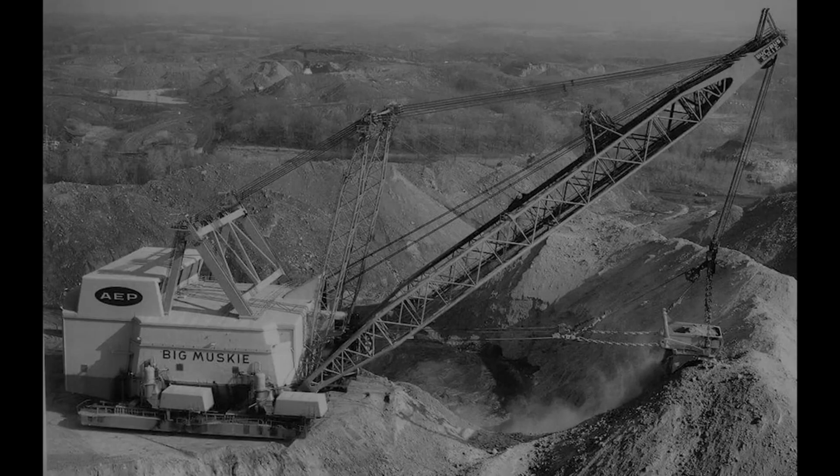A machine 20 stories tall that swallowed 180 cubic yards of earth in a single bite and ran around the clock with a crew living inside it. On September 9, 1991, a hydraulic oil fire ended its reign, and almost nobody noticed.

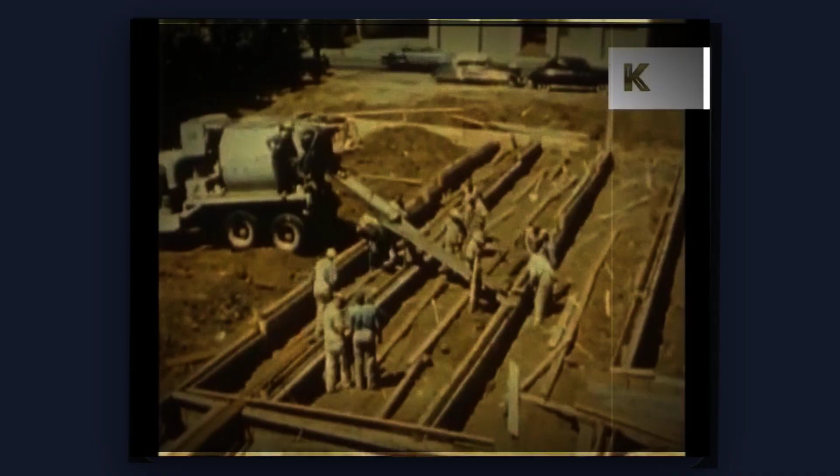The Marion 6360 was just one of 15 forgotten machines that physically built modern America. They carved the highways, poured the dams, lifted the skylines you pass every day. Most weren't abandoned because they failed. They vanished for reasons almost no one talks about.

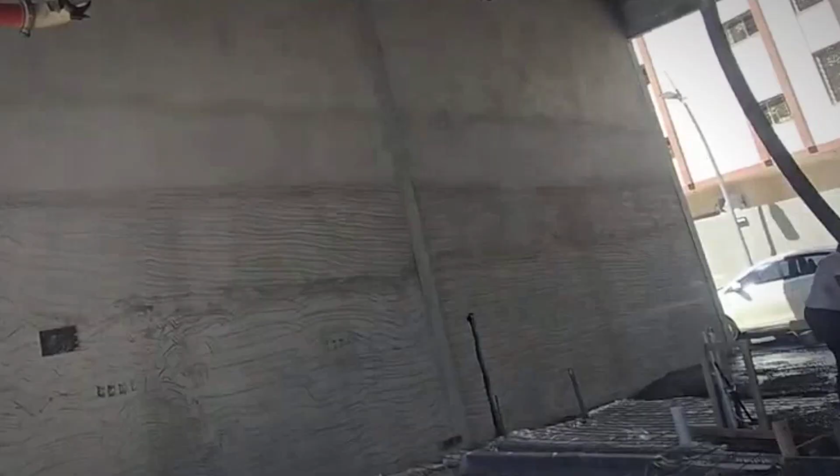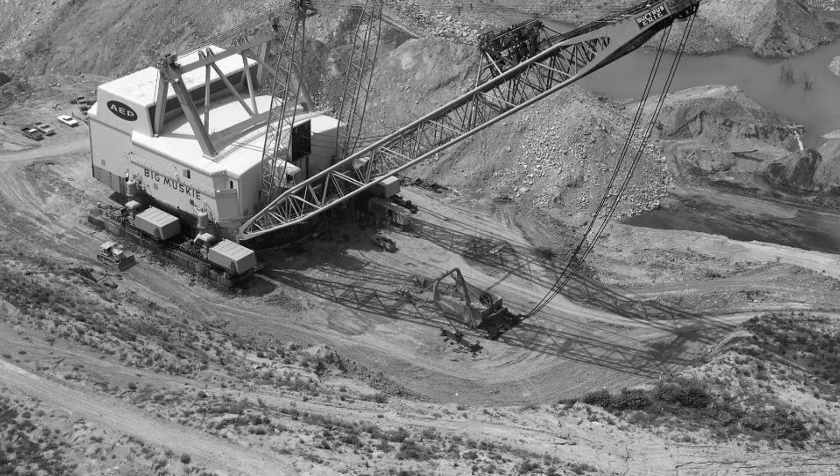Every mile of interstate, every stretch of city skyline, every concrete slab beneath a shopping mall, none of it appeared by chance. Beneath the surface of the modern American landscape lies the legacy of machines so vast and powerful, their very existence now feels improbable. These giants once thundered across open plains and city foundations, reshaping entire regions before quietly vanishing from view.

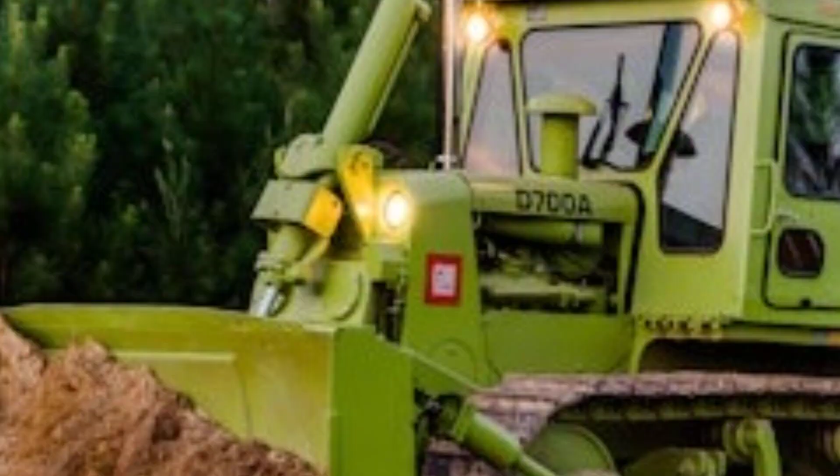The highways that carry millions of cars each day, the dams holding back rivers, the tunnels that snake beneath cities all began as raw ambition, realized only through the brute force of heavy machinery now absent from the public eye. Most people walk city streets or drive rural highways without ever thinking about what made them possible. Yet for every ton of concrete and steel, for every acre of leveled ground, a forgotten machine did the heavy lifting. These were not just tools.

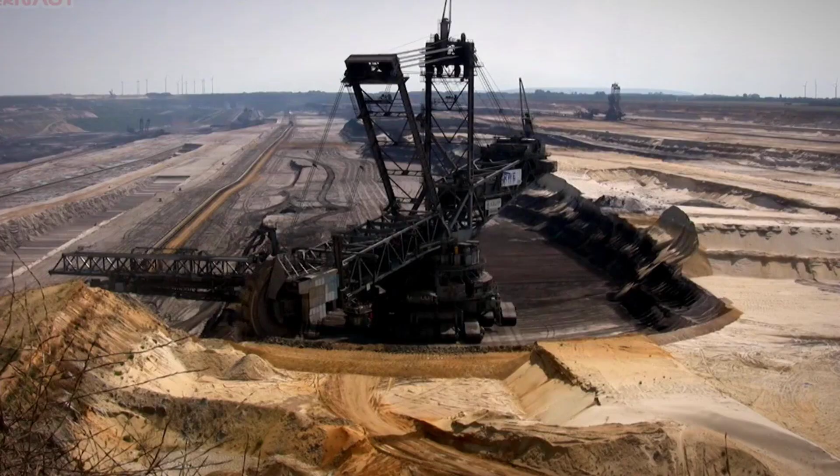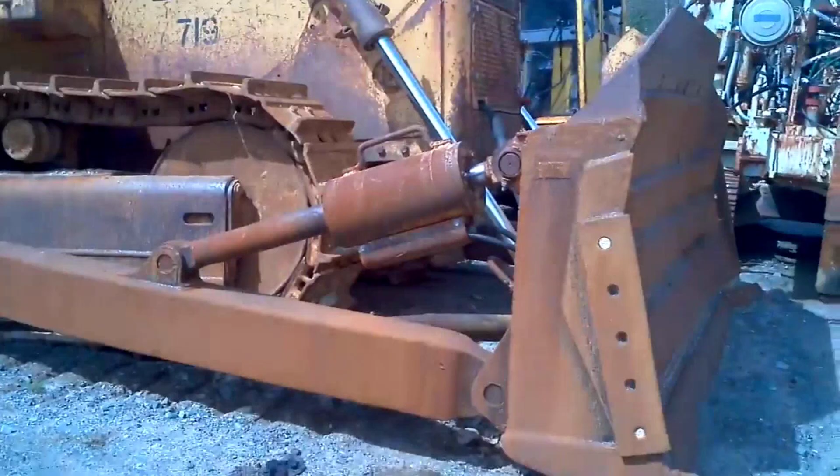They were moving factories, consuming mountains, pouring rivers of concrete, and carving paths through bedrock. The scale defies imagination. Machines that could move thousands of tons in a single shift, some so large their crews lived inside them for days at a time. Their work transformed wild landscapes into the foundations of daily life, leaving no visible trace except the world we now take for granted. Today, the machinery that built America is rarely seen or even remembered.

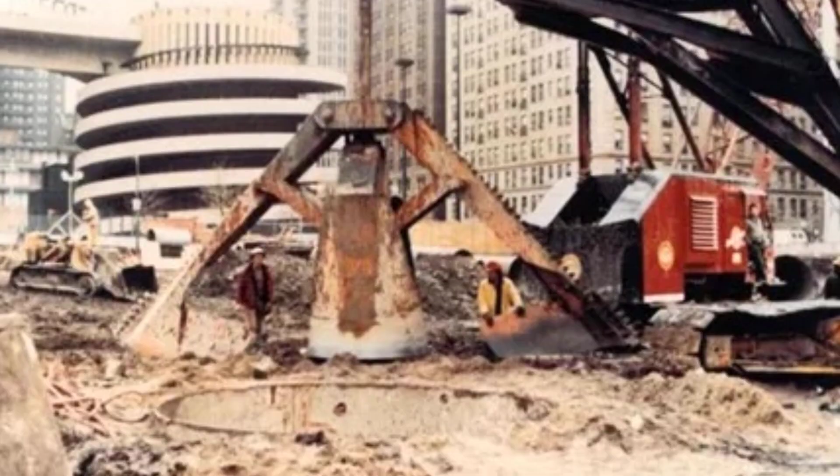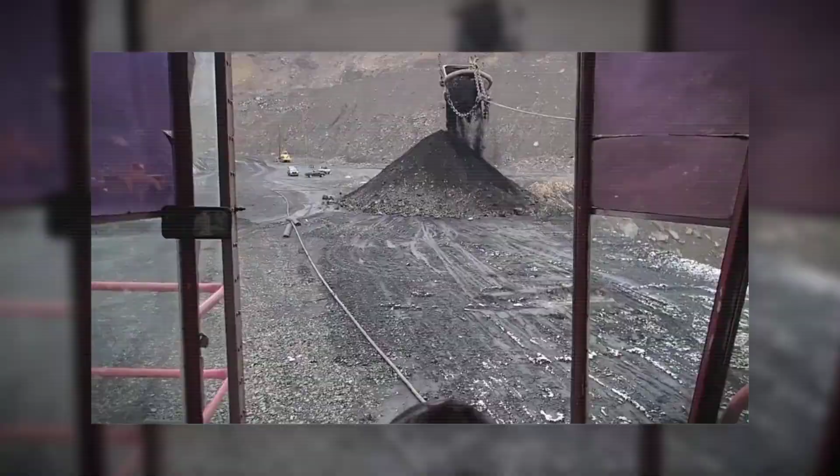Their names have faded, and their forms have disappeared, replaced by smaller, quieter, and more efficient descendants. Yet every bridge, every airport runway, every city block still rests on the labor of these vanished giants. Hidden beneath the noise of traffic and the bustle of cities, their legacy endures in concrete, steel, and earth. The story of America's rise is not just one of visionaries and architects, but of machines whose power and ingenuity remain buried in the landscapes they created.

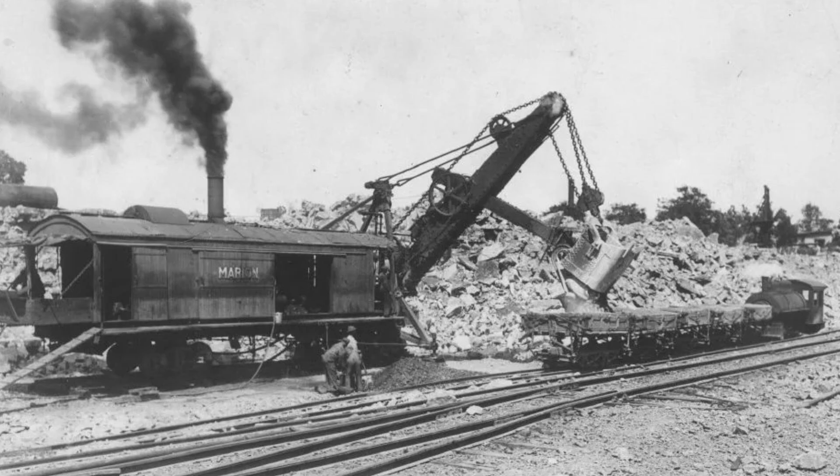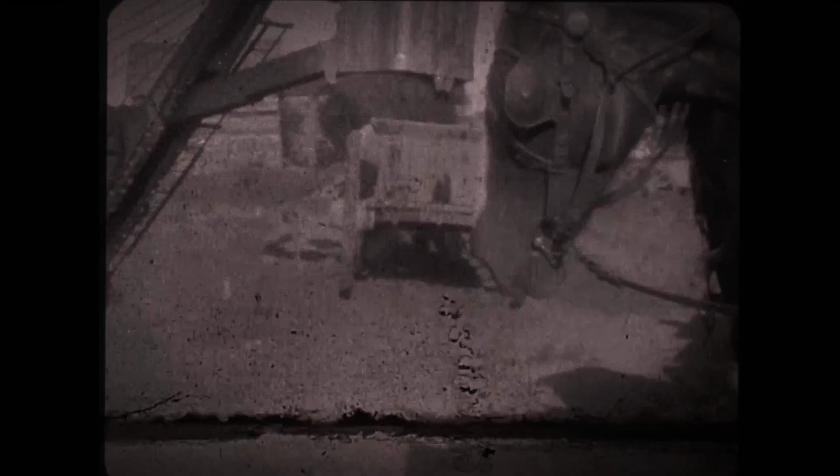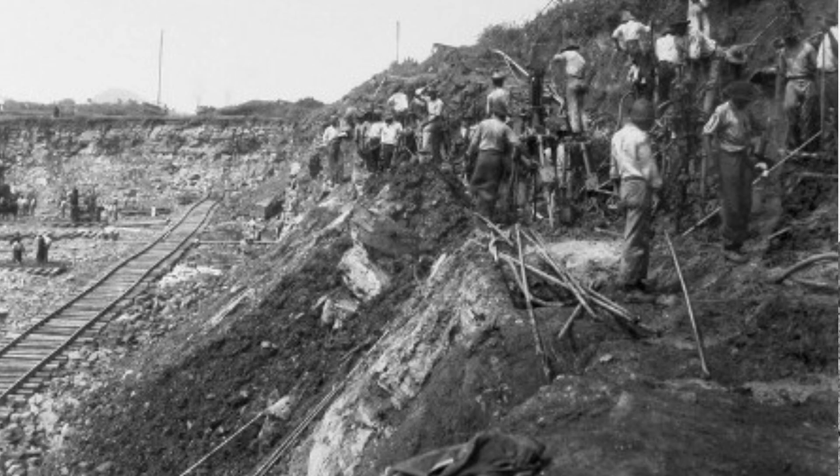On the Erie and Barge Canal projects, crews watched as the shovel's bucket bit into earth that once took 100 men days to move. Canal widening logs from the era record daily outputs near 1,500 cubic yards per machine, a leap that turned months of backbreaking work into a week's progress. In city centers, these rail-mounted giants dug deep pits for new skyscrapers, making possible the dense urban foundations that define cities like New York and Chicago. Foundation logs show a single shovel clearing thousands of tons of rock and soil per day, a pace that pushed urban construction into a new era.

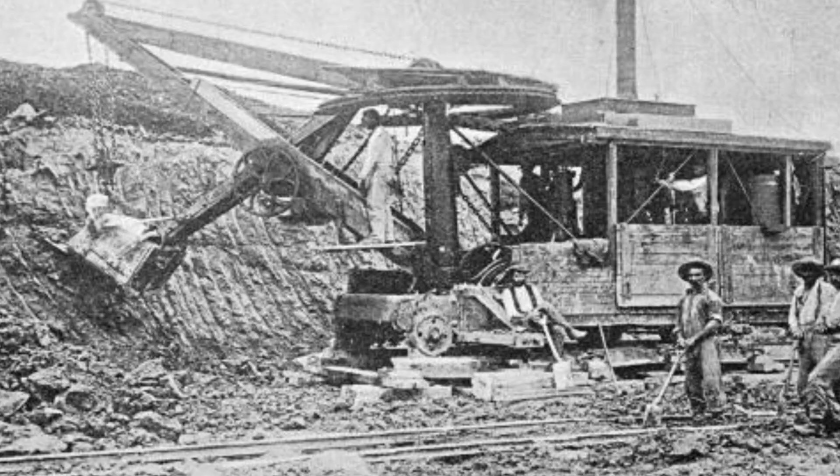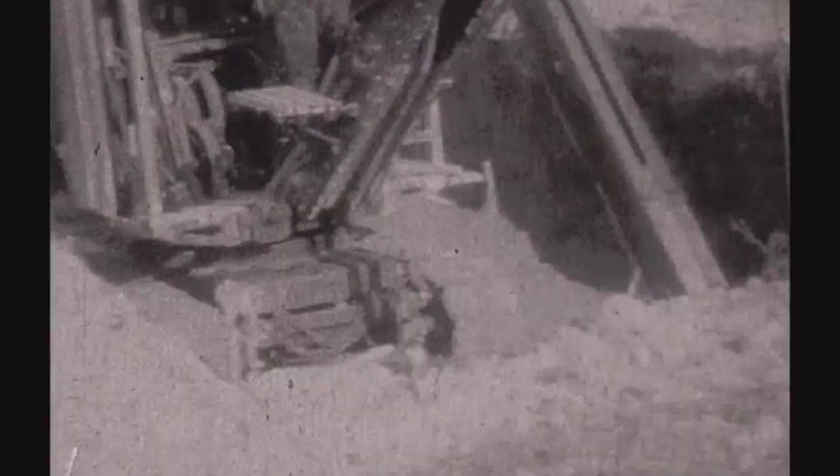For the foreman on site, the arrival of a steam shovel meant more than just speed. It meant managing a crew who fed coal to the boiler, oiled every moving part, and kept cables taut as the bucket swung overhead. The machine's mobility, rolling along steel rails laid just ahead of its path, let it chase the work, carving out the next length of canal or the next city block. Operators spoke of the heat from the firebox and the deafening roar as the shovel tore into the ground, a daily reminder of the raw energy at their command.

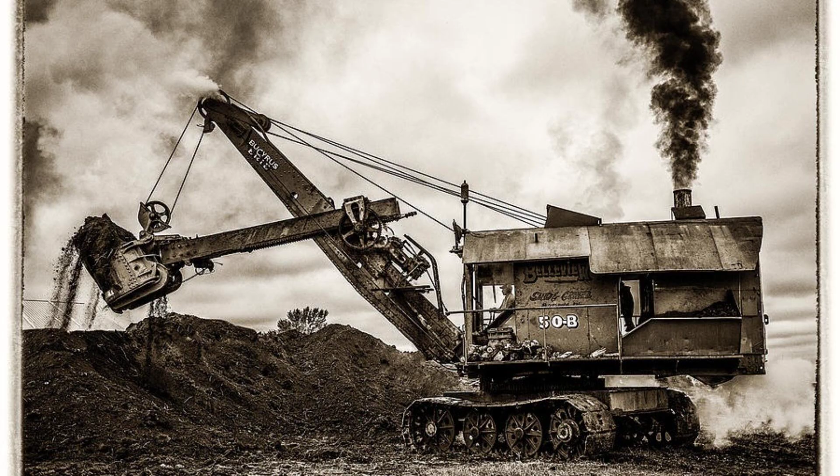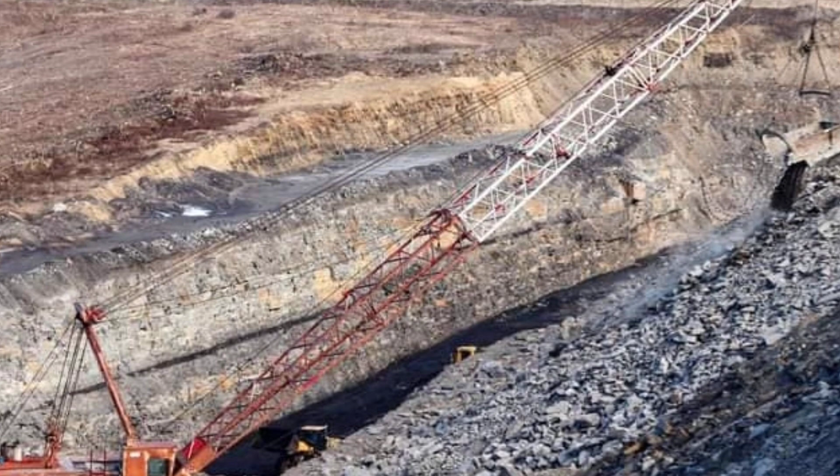Long before hydraulics or electricity took over, these steam-powered giants set the standard for what machines could achieve. Their scale and output would soon be dwarfed by the electric behemoths of the mid-century, but the first mechanized leap in American excavation belonged to the steam shovel, a machine that turned ambition into earth and steel.

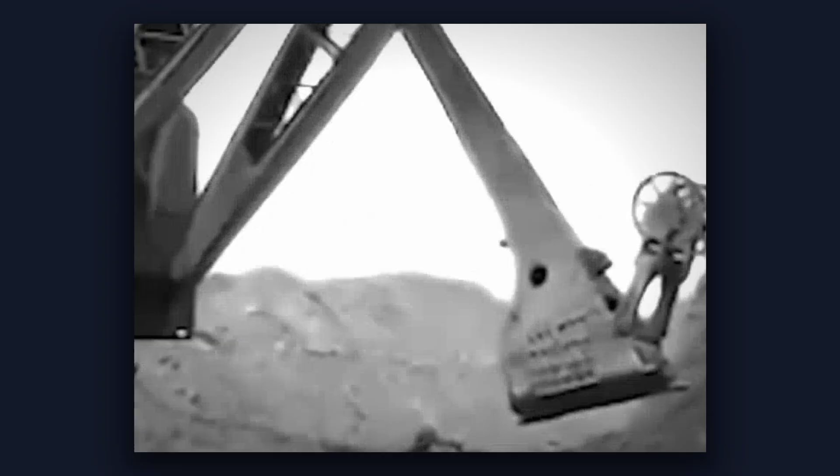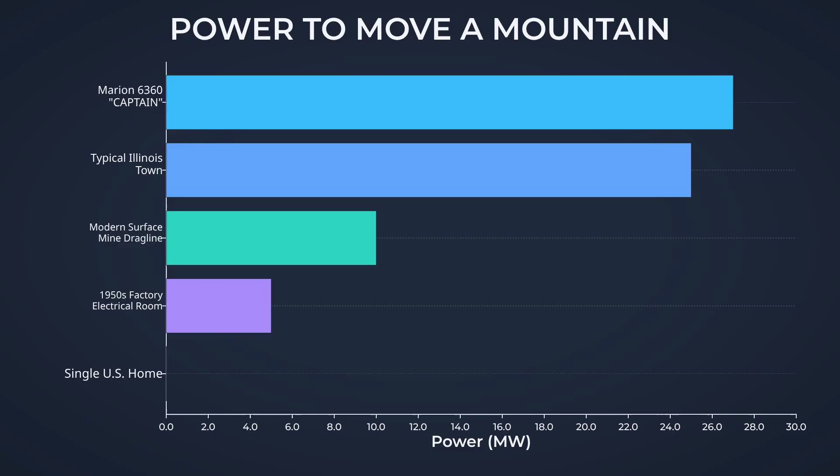The Marion 6360, known to its crew as the Captain, towered over the Illinois coal fields at 210 feet, taller than the Statue of Liberty. Its massive 180 cubic yard bucket could scoop up 150 tons of earth in a single pass. The machine stretched the length of a football field and weighed 28 million pounds, moving on 8 crawler tracks, each as wide as a city sidewalk. 20 electric motors, drawing as much power as a small town, drove its gears day and night.

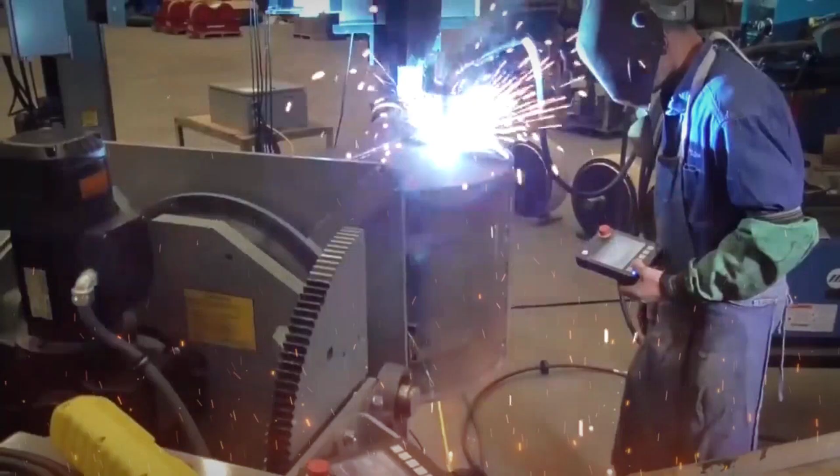For 26 years, a 4-person crew kept the Captain running around the clock. The oiler, Fred Krieger, spent his shifts climbing inside the machine's steel belly, checking lines, topping up reservoirs, and listening for the faintest change in the thrum of the engines. Operators like Gene Miller steered the Captain's arm with the touch of a lever, swinging the bucket out over the pit and dropping it into the earth, while welders and ground men kept the moving parts alive. In September 1991, the routine shattered. At dusk, Krieger noticed smoke rising from the lower frame.

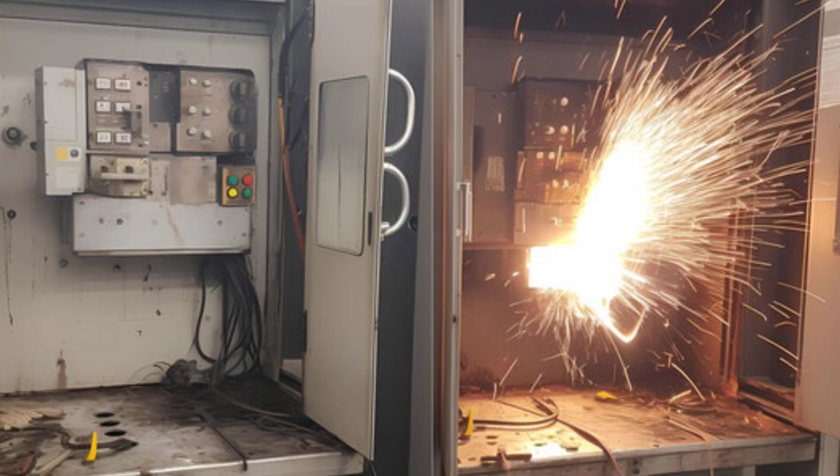Hydraulic oil had leaked and caught fire, spreading fast through the maze of cables and machinery. He and Miller grabbed extinguishers, fighting the blaze as flames licked at the steel. Groundman Gary Andrews scrambled onto the deck, searching for more extinguishers. But the fire was too much. Krieger pulled Andrews to safety as the blaze raged out of control.

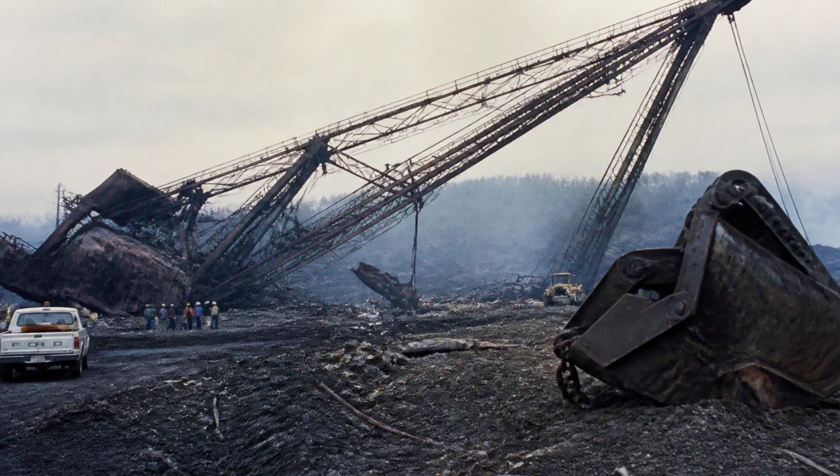No one was hurt, but the Captain was finished. The fire made headlines across the country. Insurance covered the loss, but the machine was too damaged to repair. In 1992, salvage crews dismantled the Captain piece by piece. Nothing remains at the site but reclaimed land and the memory of a machine that, for a generation, could move a mountain before breakfast.

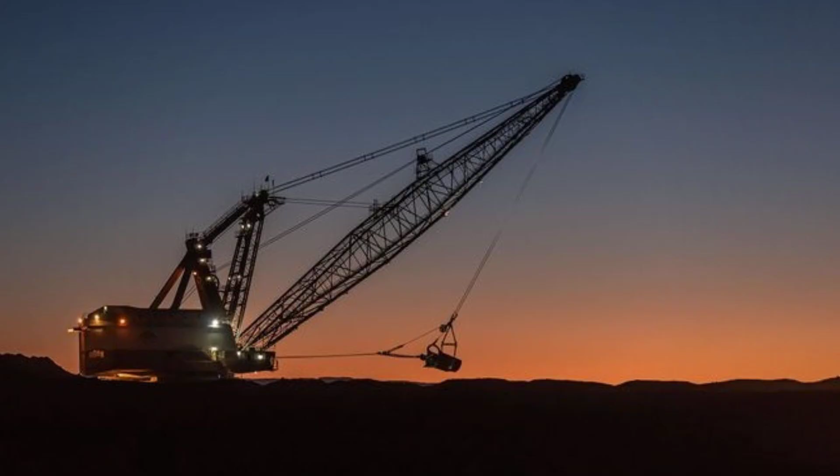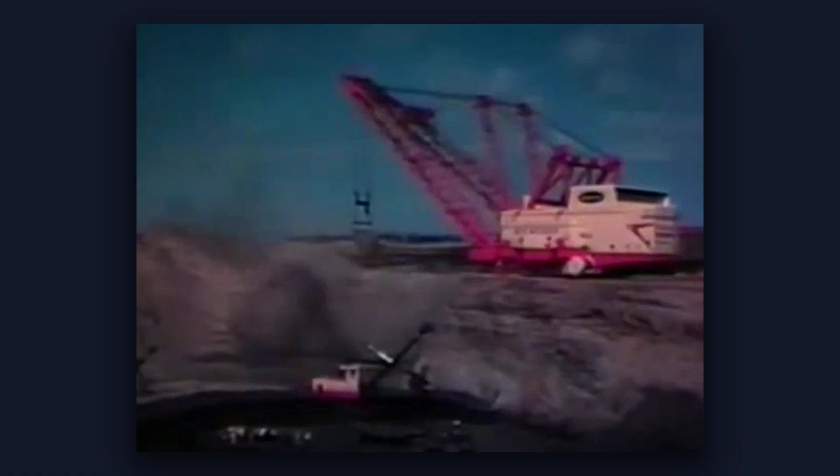A dragline operator sits high above the cut, hands wrapped around the levers, eyes fixed on the arc of the boom. The Bucyrus 4250W, with its 300-foot boom, stretches across a pit wider than a city block. Each cycle, the bucket skims the earth, hauling up enough rock and soil to fill a small house.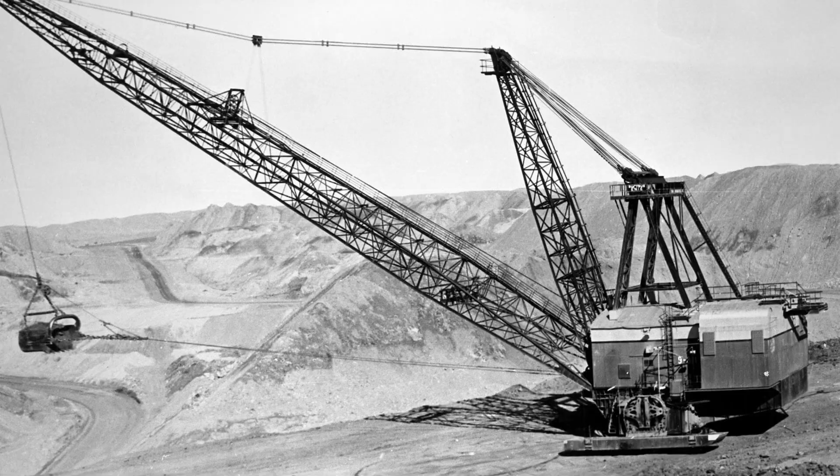The reach is staggering. No other machine could clear a span like this, moving material from places that would swallow up smaller rigs. For massive reservoir projects and open pit mines, only a dragline with this kind of arm could do the job without constant repositioning. The operator knows every creak and sway, trusting the cable lines as the bucket swings out, dumps its load, and returns for more. It's a job that demands patience, timing, and respect for the scale of the machine.

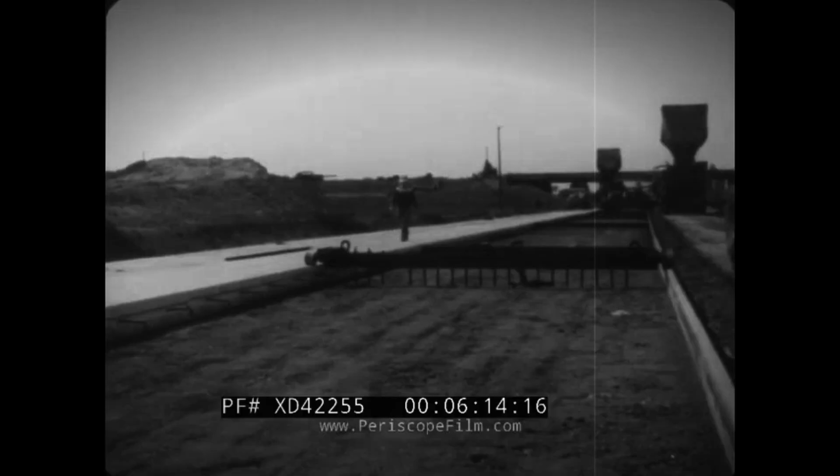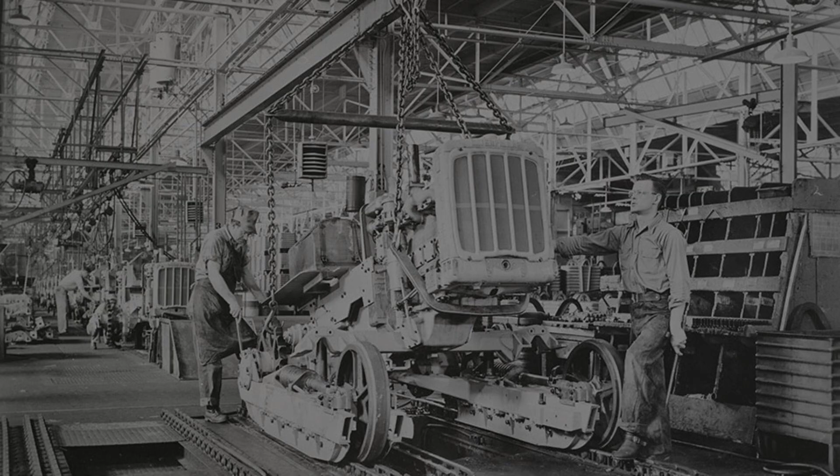But out on the highway cuts and sprawling post-war construction sites, a different kind of force took over. The Caterpillar D9 bulldozer, first built for military use, became the backbone of America's new roads. After the Federal Aid Highway Act of 1956, thousands of these yellow machines rolled off assembly lines and onto the dirt. Unlike the bespoke giants of the mines, the D9 was built for numbers, standardized, reliable, and ready to be shipped by rail or truck wherever earth needed to be moved.

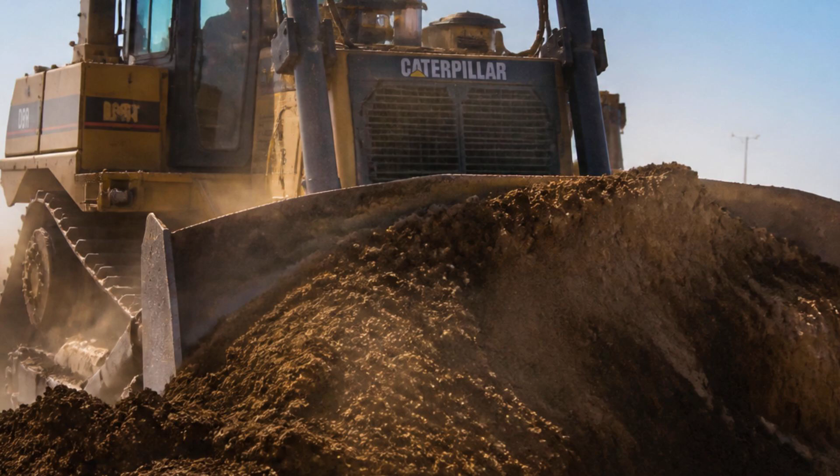A Caterpillar engineer remembers watching fleets of D9s line up at dawn, blades down, engines rumbling in unison, as they chewed through hillsides and farmland. The D9 didn't have the reach of a dragline, but it made up for it in sheer volume and speed, able to clear a path for a new interstate in days instead of weeks.

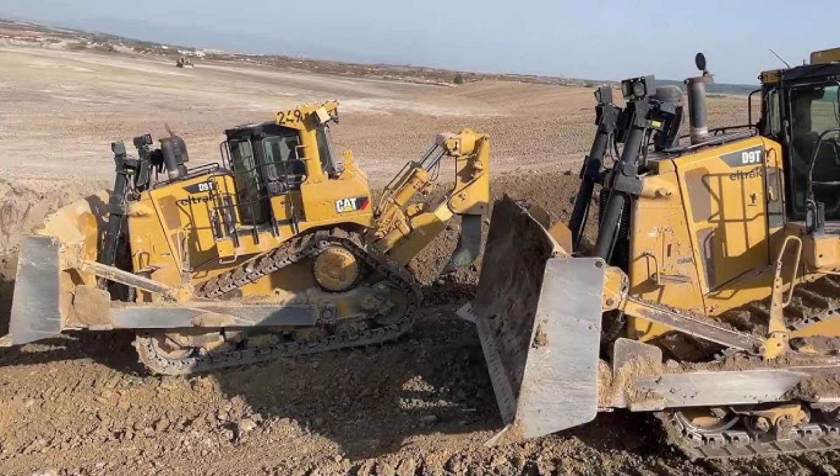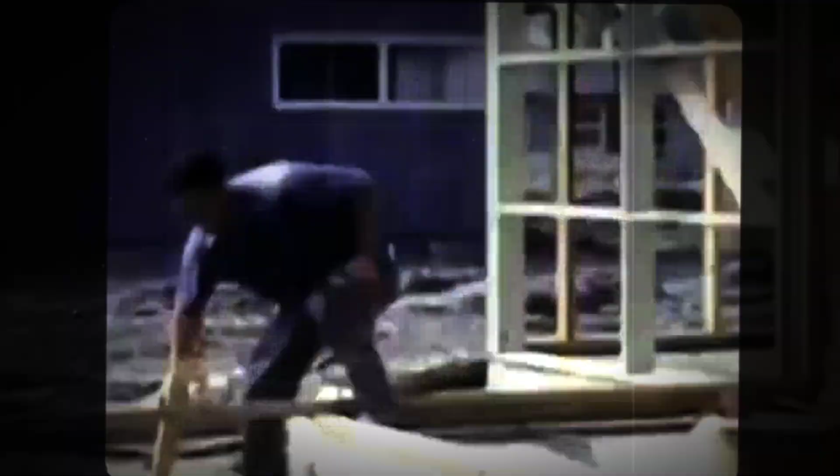The trade-off was clear. Draglines reached farther, conquering the impossible spans, but every move took time and planning. The D9s brought muscle in numbers, their strength multiplied by the thousands. Between the two, America's surface was reshaped, one machine reaching where nothing else could, the other turning raw land to the roads and suburbs that define the modern landscape.

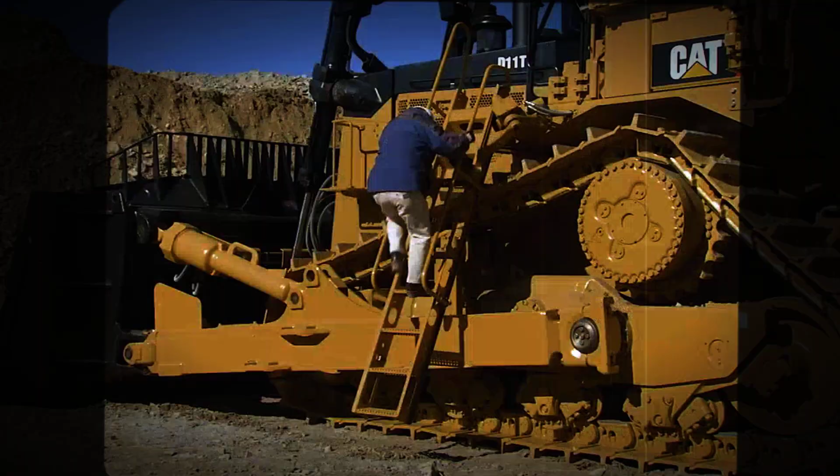Behind each machine, a human story. The dragline operator, alone in his cab, and the engineer, who watched his designs roll out across the nation. Both knew that their machines would leave marks that would last for generations, even as they themselves faded from memory.

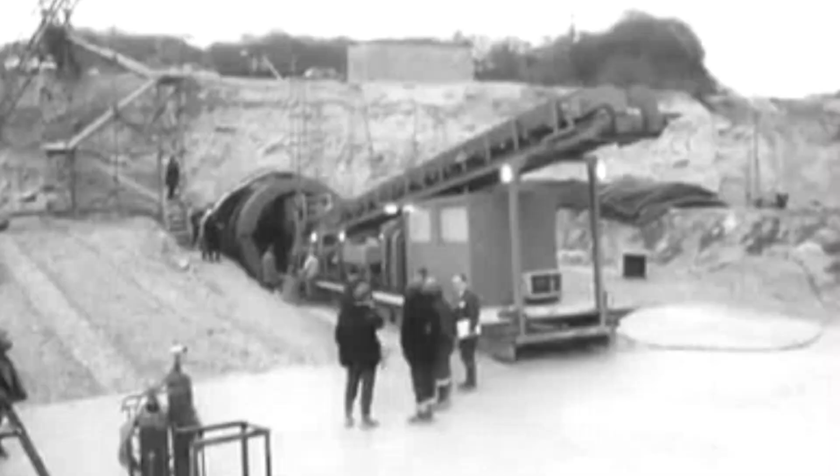Far below the noise of city traffic, tunnel boring machines press forward through darkness, carving new arteries for subways and water mains. The first American tunnel boring machines, rolling out in the early 20th century, were unlike anything above ground. They had a rotating steel face 20 feet across, fitted with hardened cutters and powered by electric or steam drive. Each revolution chewed through bedrock, pushing forward at a pace that made hand-dug tunnels obsolete.

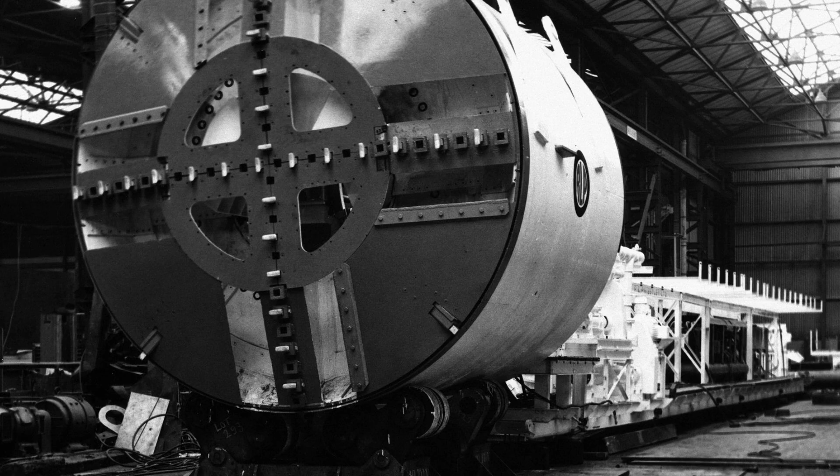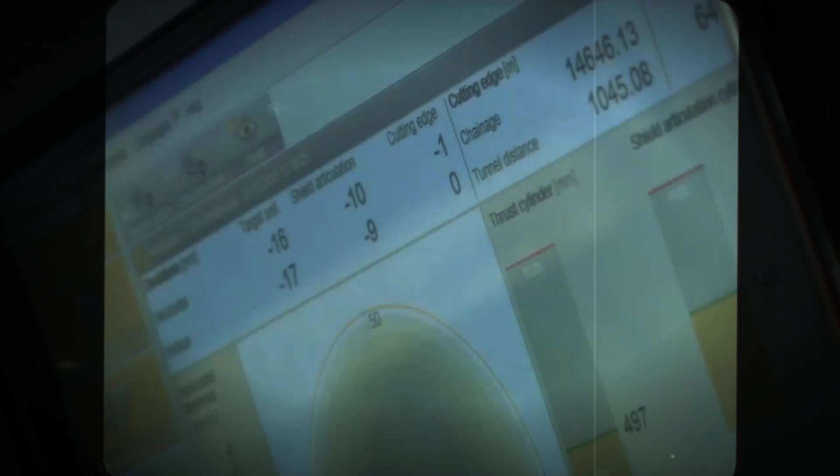In the 1970s, engineers introduced earth pressure balance shields, allowing for continuous tunneling under rivers and dense neighborhoods without risking collapse above. A tunnel boring machine specialist recalls the quiet hum of the cutter head, the vibration of controls under his hands as the machine inched ahead, leaving behind a perfectly round tunnel ready for concrete lining. These machines worked unseen, their progress measured not in city blocks but in feet of rock and clay quietly displaced each day. Yet the world above relied just as much on another unsung marvel, the concrete batch plant.

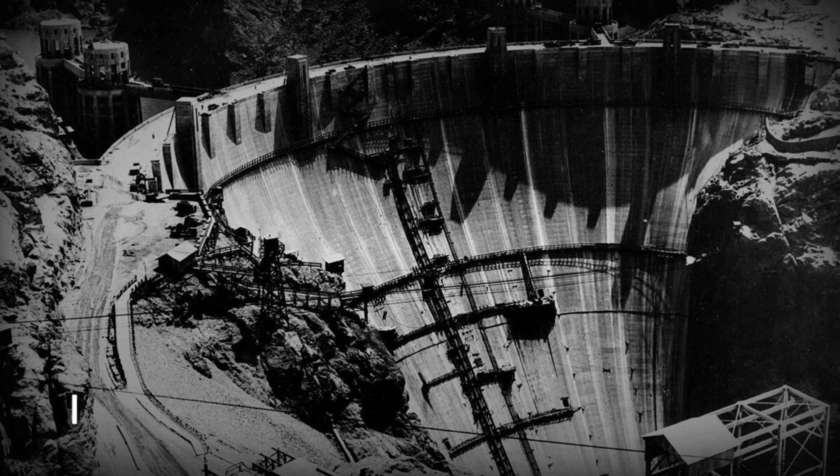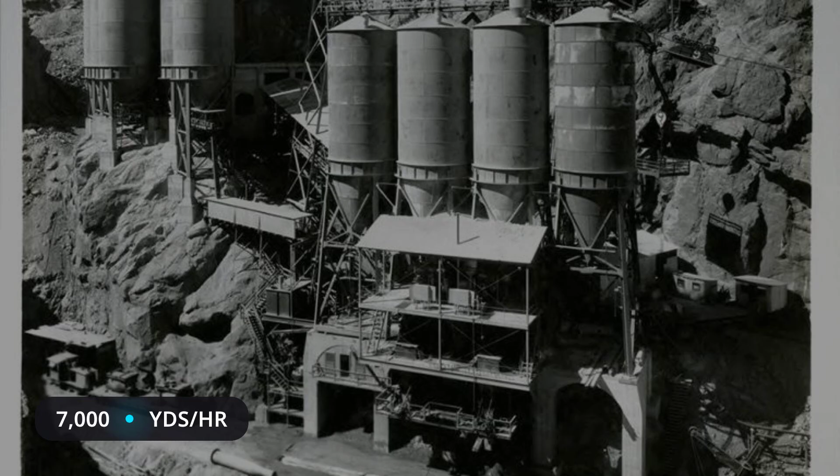At Hoover Dam in the 1930s, the challenge was not only to pour concrete but to keep it coming without pause. The on-site batch plants, run by supervisors who tracked every mix and pour, could produce up to 7,000 cubic yards of concrete an hour, enough to fill a city swimming pool in minutes.

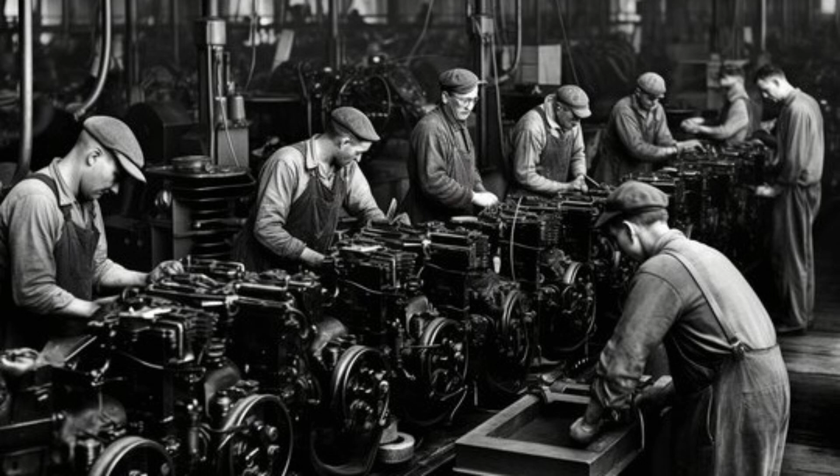Both underground and at the edge of canyons, these machines operated as hidden lifelines. The tunnel boring machine engineer and the batch plant supervisor shared a common goal: keep the process moving, keep the city above, or the dam below, alive and growing. Their work vanished from sight, but every mile of tunnel and every towering wall of concrete stands as proof of these relentless, forgotten machines and the people who kept them running.

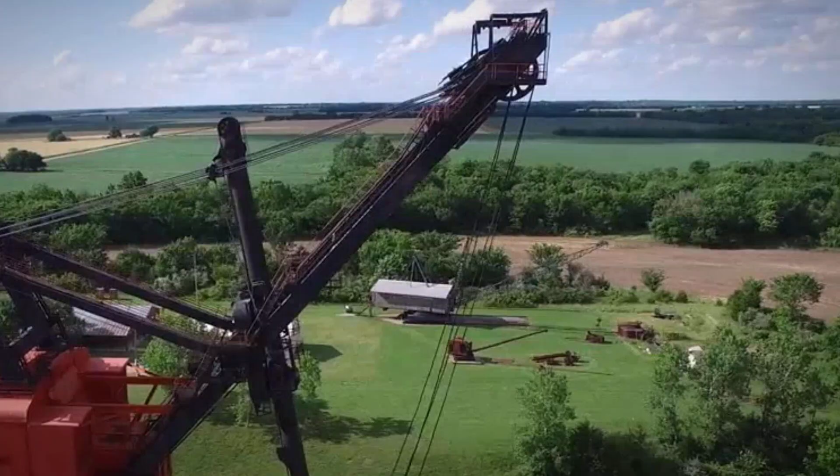A dragline chief rests his hand on the battered steel of a preserved walking foot, its mechanism patented in 1913. Engineers still come to study how this giant, weighing thousands of tons, could lift itself and stride forward.

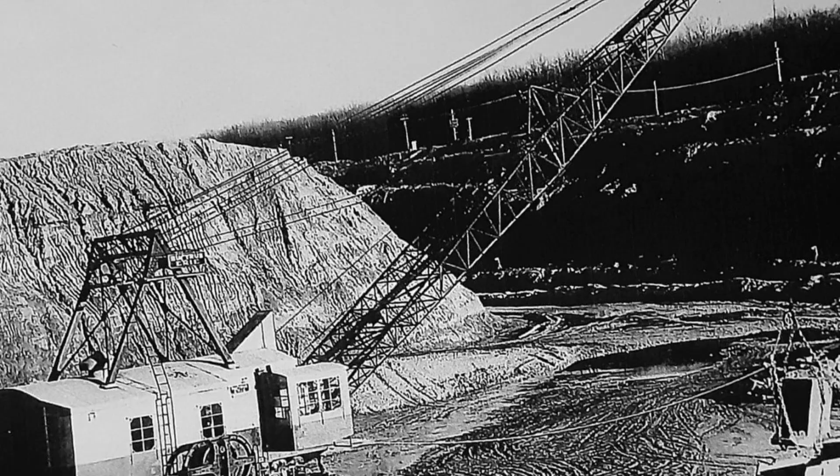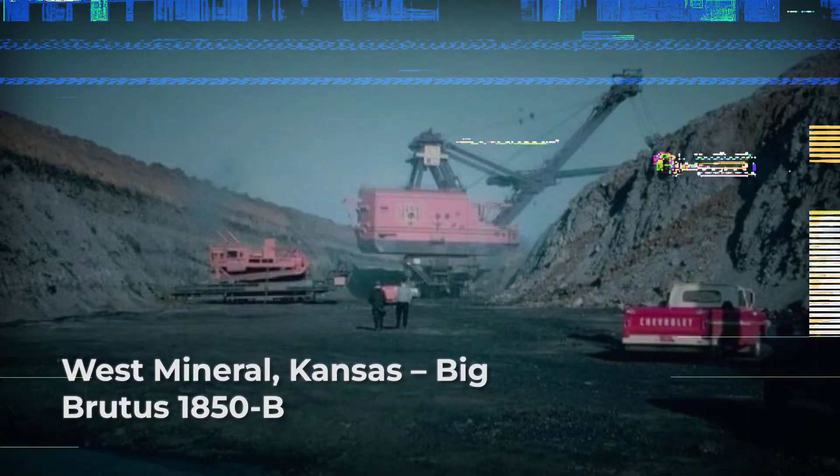The dragline's feet rock and pivot, shifting the entire machine 30 feet at a time, covering ground that would trap any crawler. In Kansas, Big Brutus, a Bucyrus 1850B, once walked across the prairie, moving 60,000 cubic yards of earth in a day. Its reach and mobility let it tackle terrain others avoided, and its legacy endures in museum yards and the stories of those who kept it running.

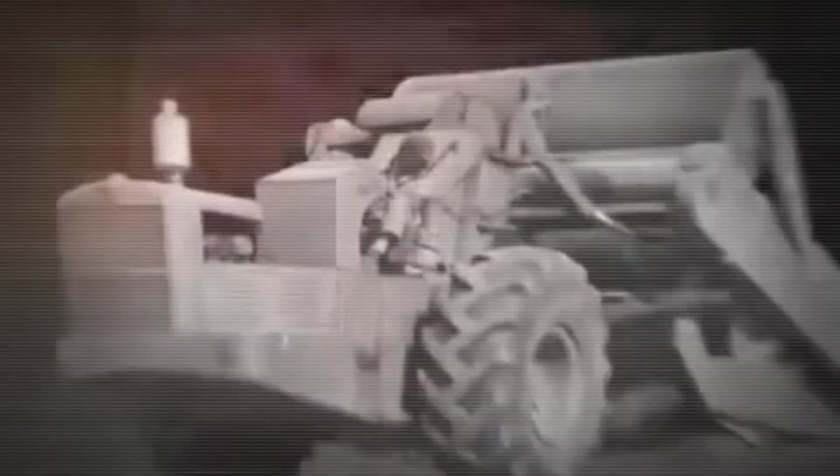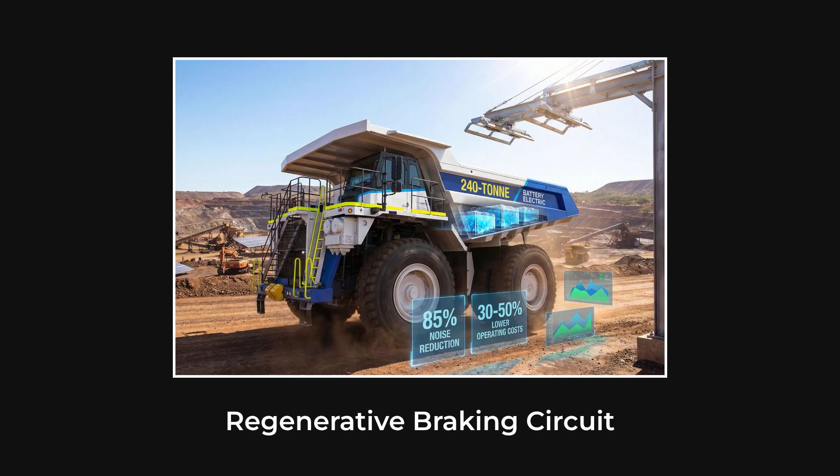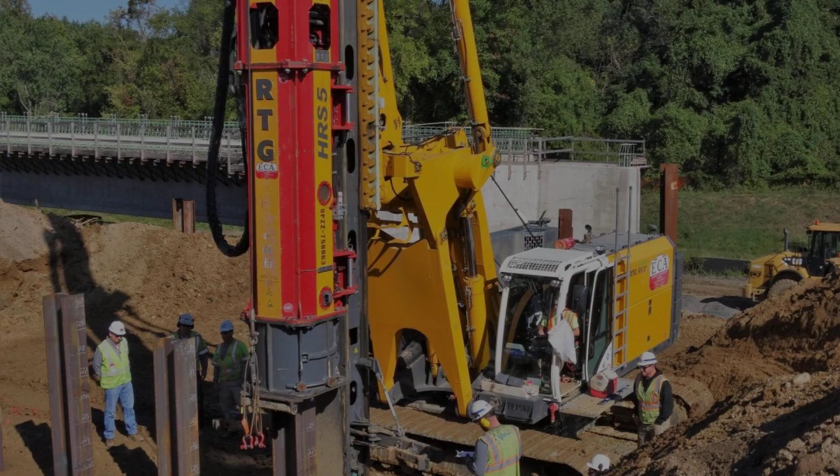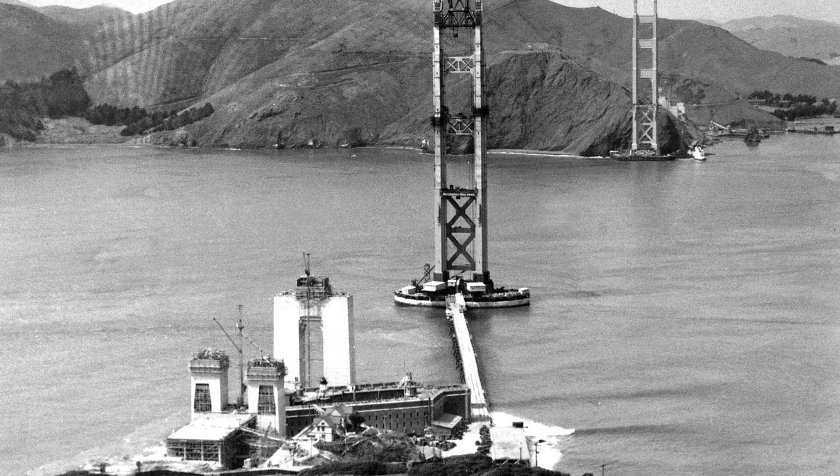In Alaska's oil fields and Nevada's open pits, these electric haulers cut travel times and kept projects moving, reshaping the economics of earth moving. On a bridge site, a pile driver foreman checks his logbook. 1,080 piles, driven in 6 months, each hammered deep into river mud by steam or diesel rigs. Foundations for ports, bridges, and waterfront towers all begin with the thunder of the pile driver. Without these machines, the Golden Gate's towers and New York Harbor's piers would have sunk into the silt. Every pile holds up a span that millions cross each year.

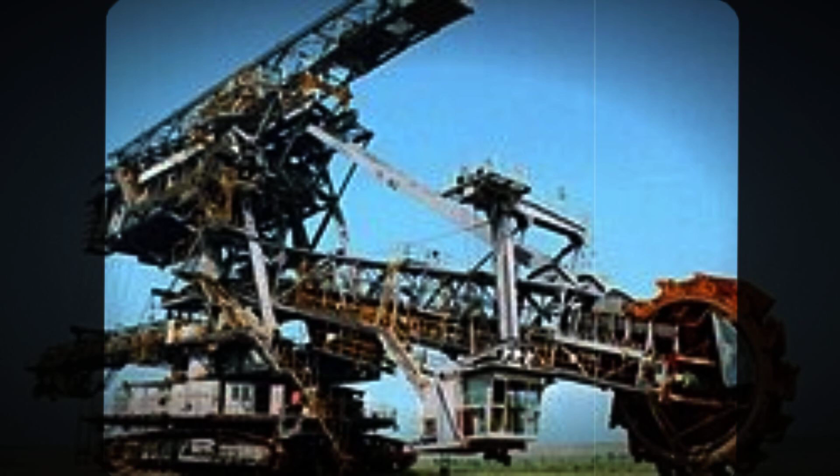At a lignite mine, an adaptation engineer points to a bucket wheel excavator spinning at full tilt. Its teeth bite into earth, feeding a conveyor that never stops. With a capacity of 12,000 cubic yards per hour, the bucket wheel moves more in a shift than a fleet of shovels in days. Licensed from German designers, this technology set new standards for continuous mining. These machines, once the future, now stand as monuments to an era when moving mountains was routine.

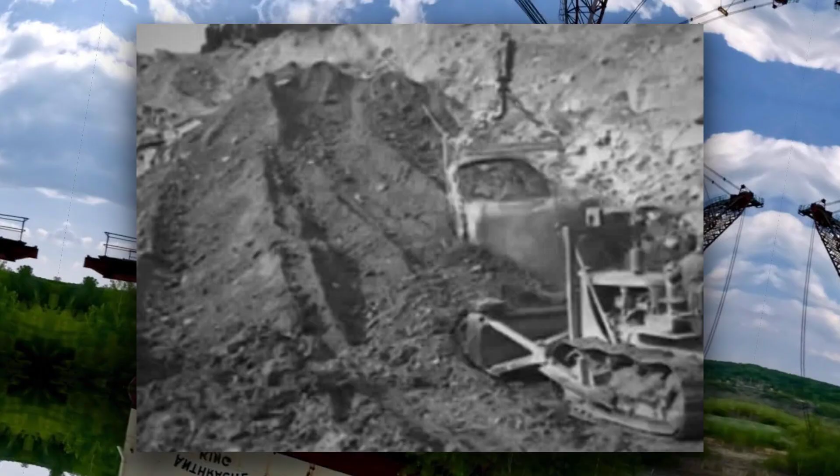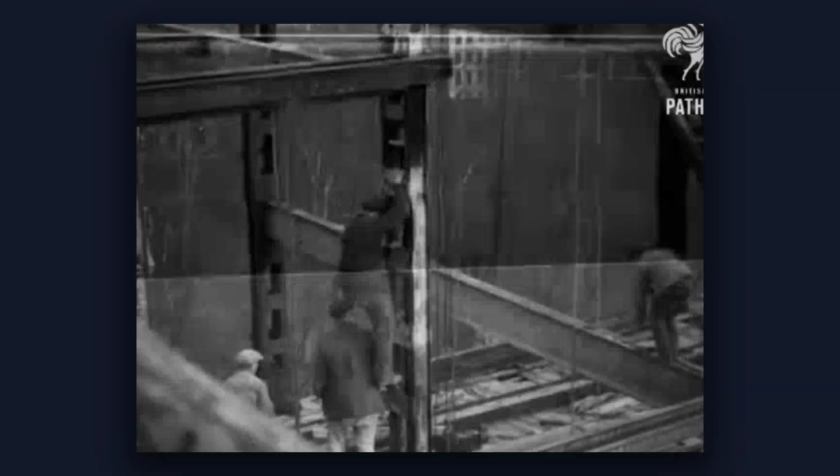High above the city streets, a latticework of steel grows floor by floor, each piece hoisted into place by a machine as essential as the beams themselves. The stiff-leg derrick, a crane with a single rigid leg and a web of guy wires, became the silent backbone of the 1920s skyscraper boom. On the Chrysler Building, crews relied on a derrick anchored to the rising frame, capable of lifting 25-ton steel girders from street level to the upper floors.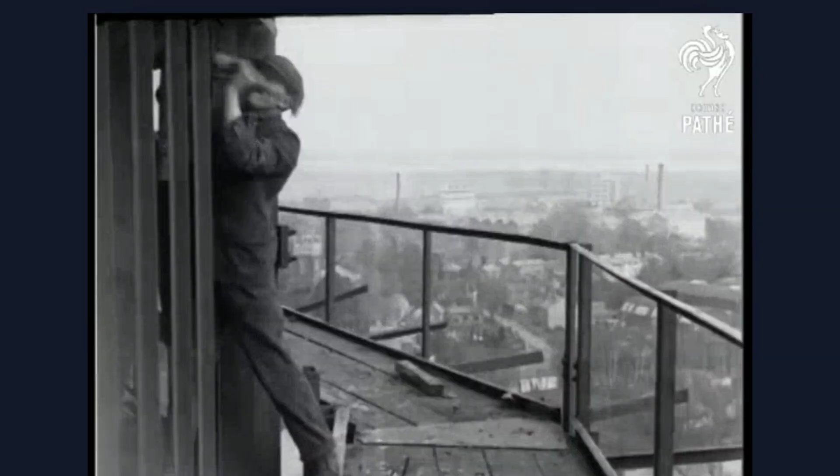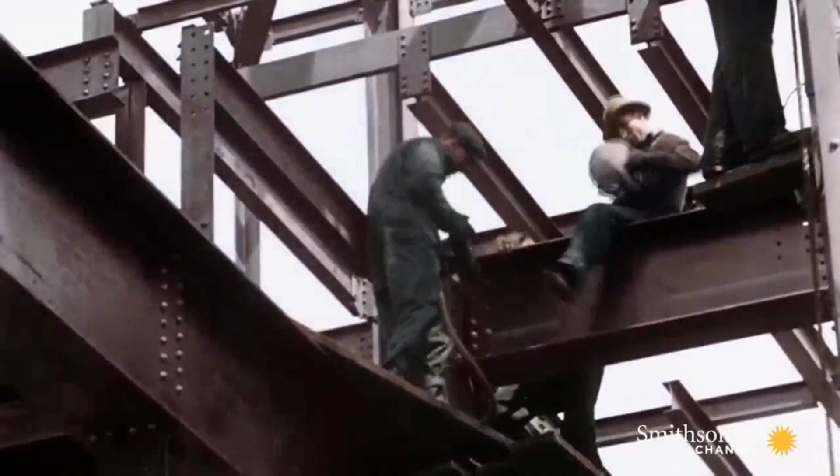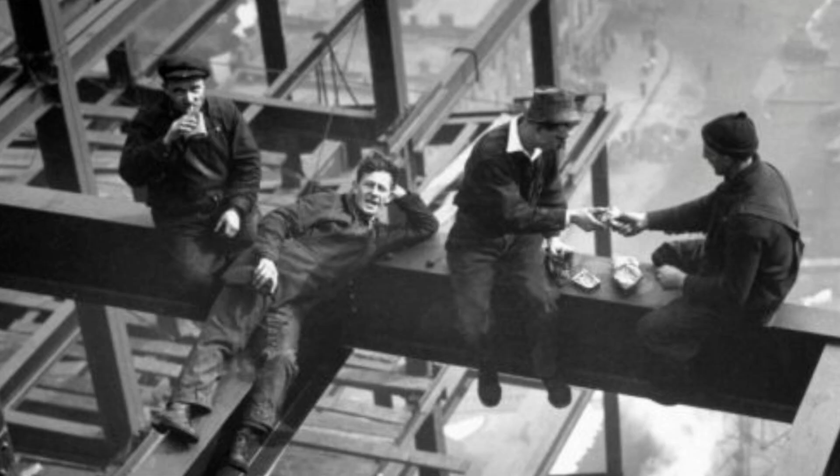Every morning, a rigger checked the cables, tested the winch, and signaled the all clear. The derrick's boom swung out over the edge, a steel column dangling high above Midtown, then rose steadily, guided by hand signals and the steady pulse of the winch drum. In the space of a single shift, hundreds of tons of steel would be staged from floor to floor, the derrick climbing with the building, always just a few stories ahead of the work below.

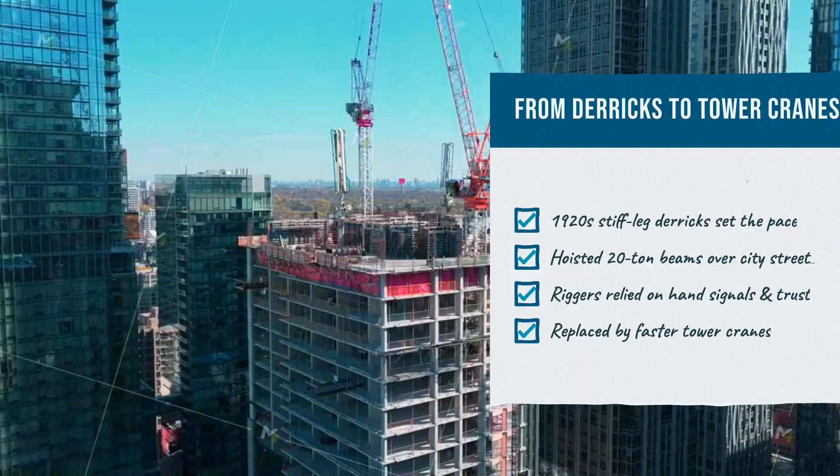For the rigger, the job was part choreography, part nerve, trusting in the strength of the cables and the precision of the crew. These cranes solved the vertical puzzle of early skyscraper construction, letting architects reach new heights and giving cities their iconic skylines. Yet as new technologies arrived, including tower cranes and hydraulic lifts, the stiff-leg derrick faded from view, its legacy hidden in the bones of the buildings it helped raise.

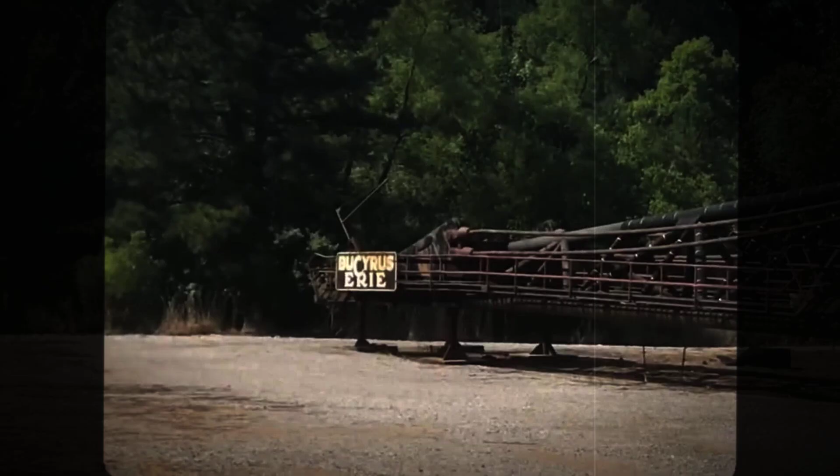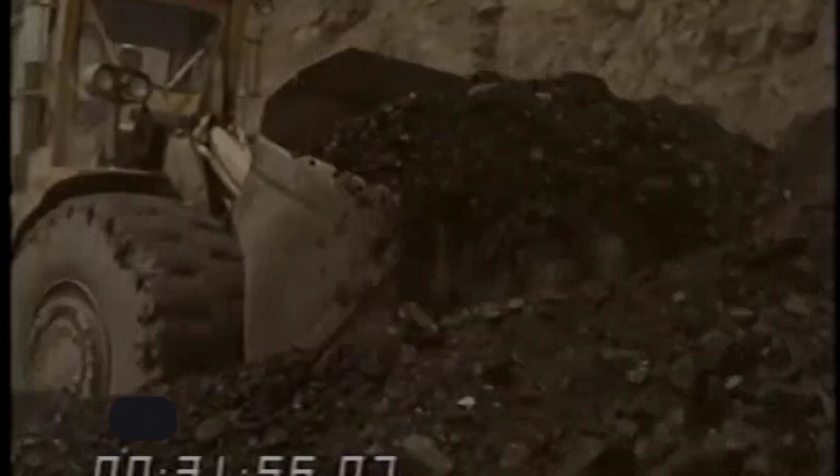Regulation, shifting energy priorities, and rapid advances in technology swept away the era of giant machines almost as quickly as it began. In 1977, the Surface Mining Control and Reclamation Act forced coal companies to post bonds and restore mined land, turning reclamation from an afterthought into a major expense. Operators faced costs as high as $12,000 per acre, a burden that made it hard to justify keeping machines like the Bucyrus draglines or bucket wheel excavators running.

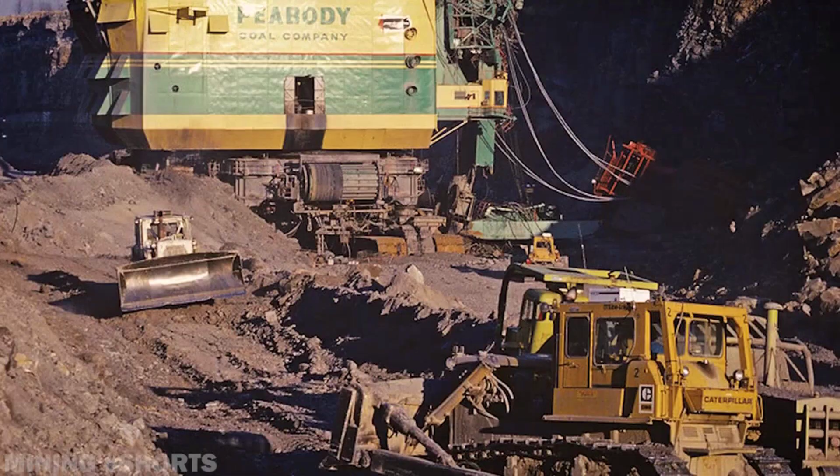The 1990 Clean Air Act amendments tightened emission standards even further. Meeting these new rules meant expensive retrofits, sometimes over $200,000 per machine, or early retirement for fleets that could not be upgraded. Compliance costs across the industry soared into the billions, and companies began to phase out older, dirtier equipment in favor of smaller, more efficient alternatives.

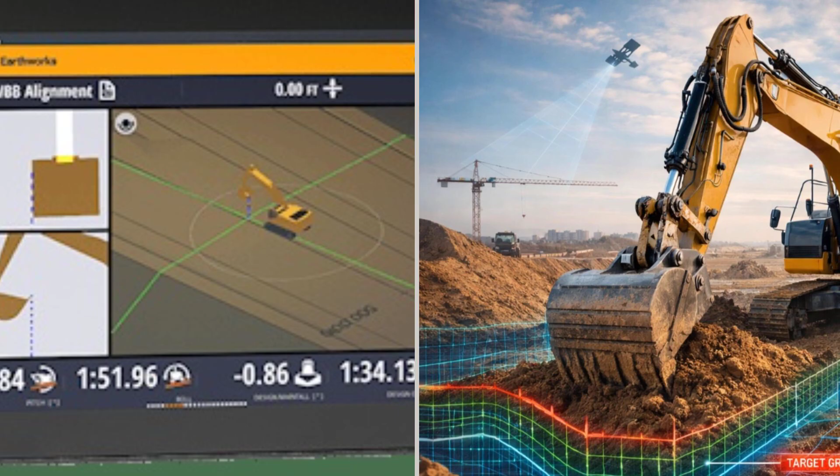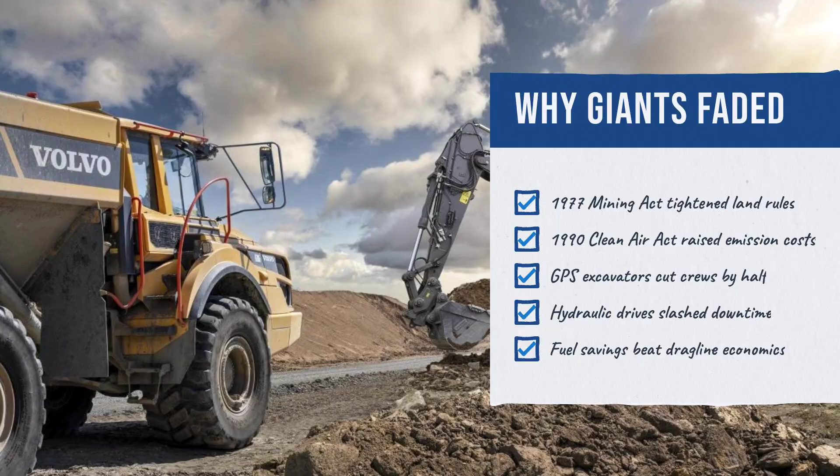At the same time, the rise of hydraulic excavators and GPS-guided controls changed the economics of construction and mining. New machines could do the job with less fuel, fewer breakdowns, and smaller crews. The adoption curve was steep, and by the late 1990s, hydraulic excavators had replaced most cable-operated giants on active sites. Museums and preservation groups tried to save a handful of these titans, but the cost of moving, housing, and maintaining a 12 million-pound shovel or a 300-foot dragline was often too great. Most were cut up for scrap, their stories nearly lost.

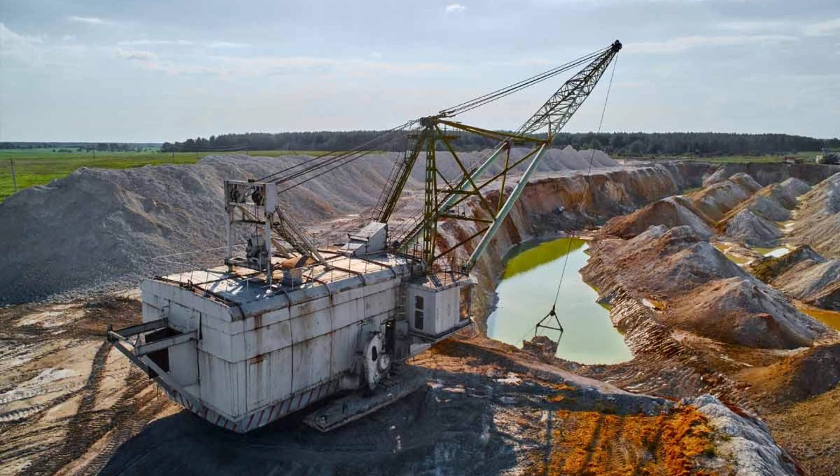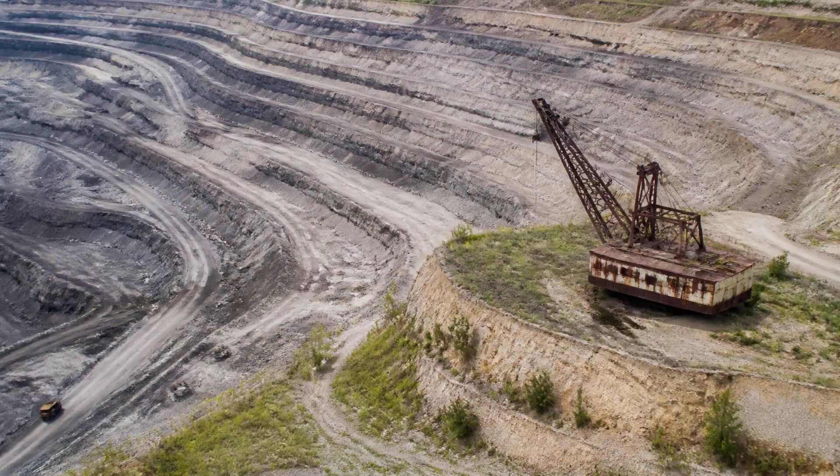Yet behind every machine stood a team of engineers, operators, and mechanics whose skill and grit made the impossible routine. They designed booms that reached across valleys, kept engines humming through storms, and coaxed precision from steel monsters built for brute force. Their names rarely appear in history books, but the bridges, dams, and skylines of America rest on their work. The legacy of these machines, and the people who ran them, endures in the very ground beneath our feet.

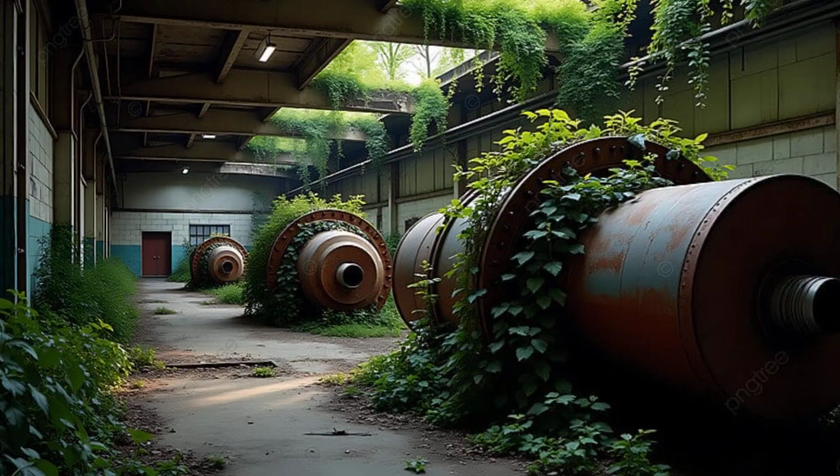The bones of American infrastructure rest on machines few remember, and their legacy shapes every highway, skyline, and city grid we use today. As new technologies promise progress, our foundations grow older and more invisible. What we choose to remember and to forget still determines the world we build next. The future's strength depends on honoring the unseen hands that made it possible.